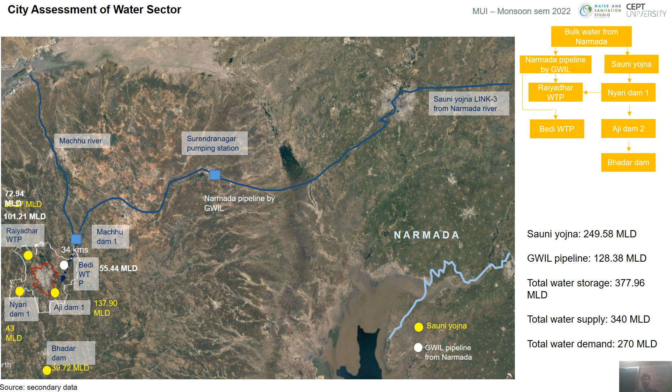Our city assessment of Rajkot depends mostly on the Narmada river through GWIL pipeline, Sauni yojna, and then it goes to dams and WTPs. Rajkot city depends mostly on external water sources, and to find an alternate water source there has been a case study for popular water sources in India, under which groundwater treatment plant, wastewater treatment plant, different water reservoirs, dams, and desalination plant have been looked at.

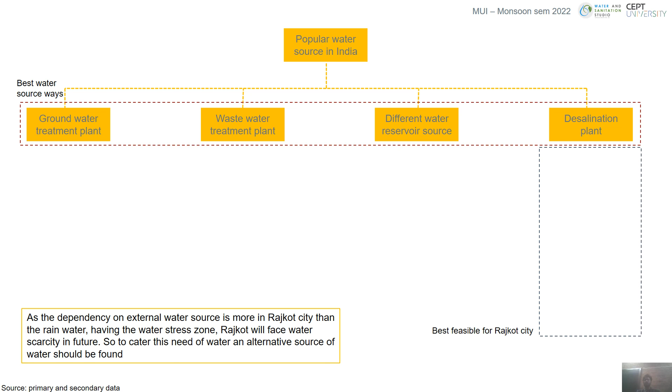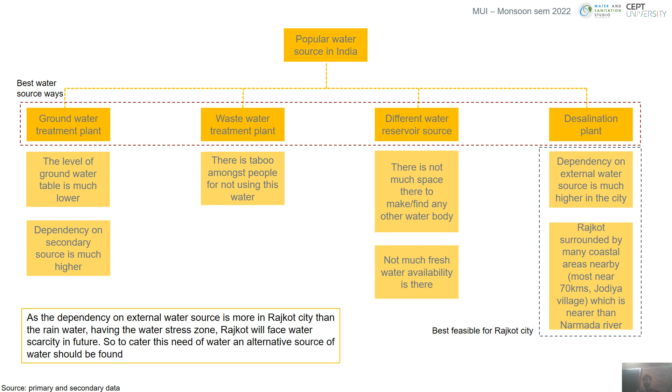Desalination plant is most feasible because groundwater level is low and dependency on secondary source is high, and there is a taboo amongst people for not using this water, and different site locations for reservoir and dams are not available.

Different case studies are seen, out of which some are taken as reference for my study. The technology used is seawater reverse osmosis plant, in which the process shows the intake facility to end user customers.

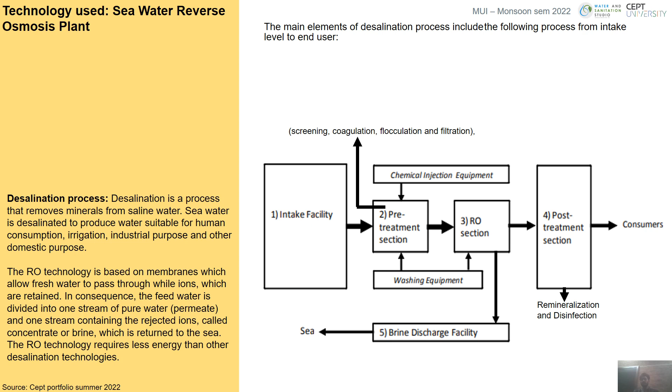Problem tree analysis highlights major problems such as water resources, urbanization, industrialization, which has effects on water stress, less water storage, and limited duration of water supply.

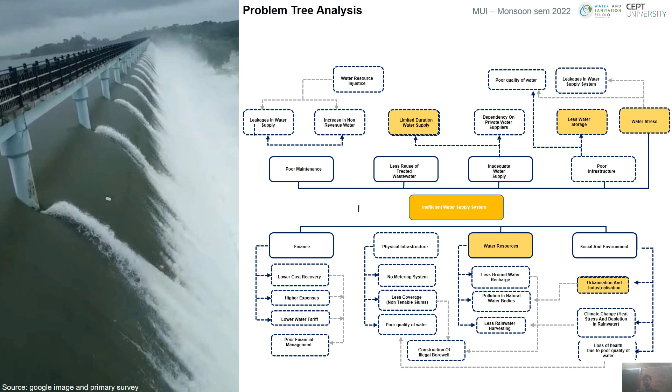The aim of the project is to identify a feasible alternate source of water in Rajkot city, followed through approach and methodology for the pilot project.

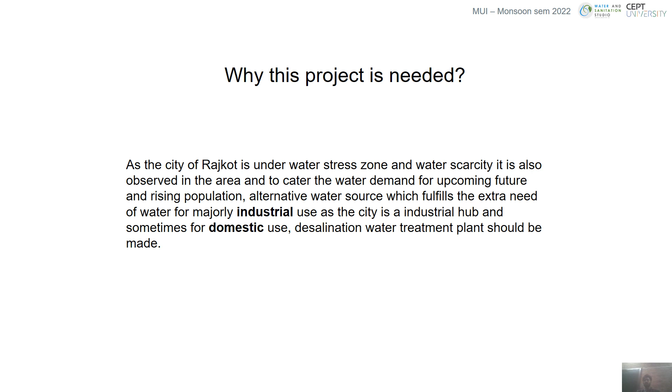This project is needed to supply water for future industrial use and in summer for domestic use.

Rajkot is an industrial hub and it receives water through GWIL or RMC water, private water supply, or private water borewells. Some industries were surveyed by me to know the water consumption.

Cost comparison is done through private water supply and desalination water, and desalination water is much cheaper than the private water supplier. Through surveys, people are more willing to pay for desalination plant water than private water supply.

In summer, the excess water will go to people for domestic use.

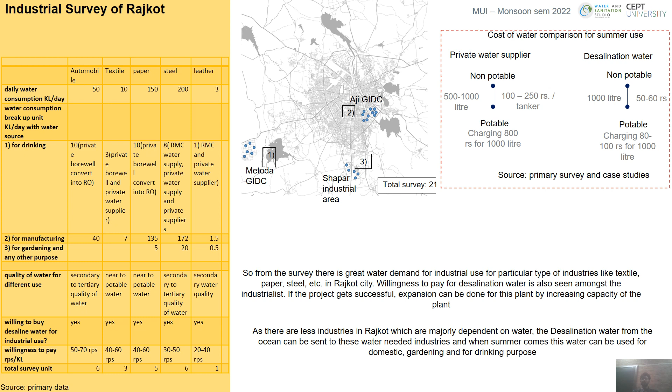Water from GWIL or RMC connections is not much in use in industries, while private water supply is not regularized, and borewells deplete the groundwater level.

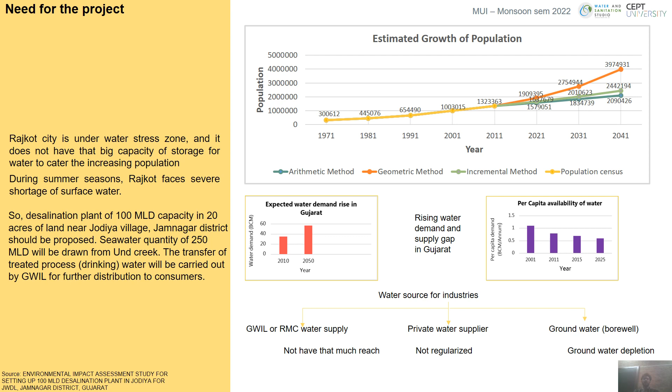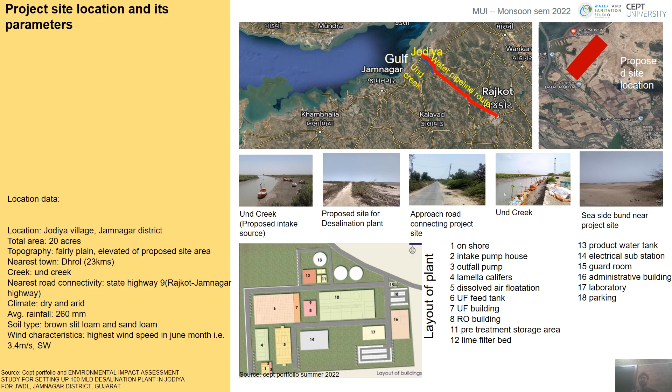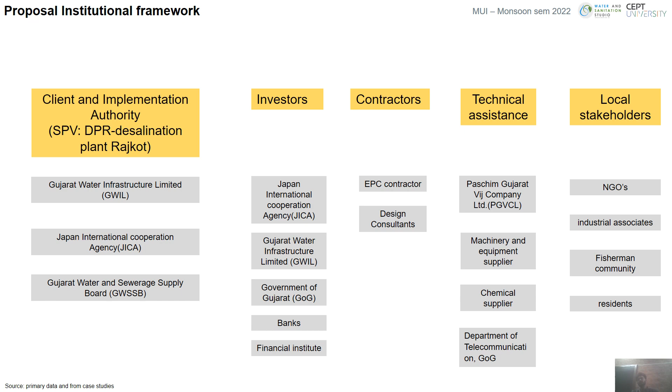Proposed institutional framework has five heads such as client and implementation authority of SPV, different investors, different contractors, different technical assistance, and different local stakeholders.

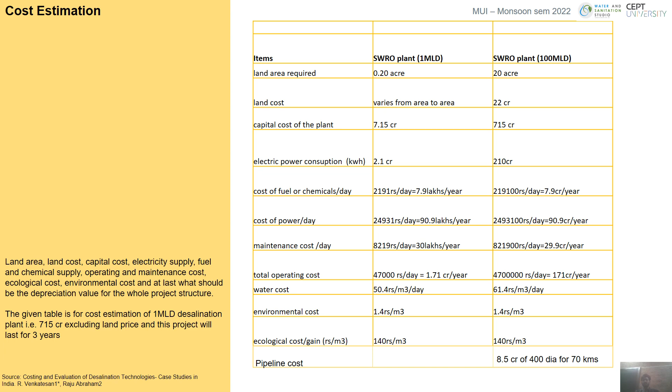Cost estimation for the project for one MLD plant is there through different references and case studies. From that I have taken out the 100 MLD cost, which is purely based on assumption and references through different case studies. The capital amount is 715 crore, and the construction phase is for 3 years.

The stakeholders are GWIL, GWSSB, and JICA, which form the SPV, which works for support agreement or permission for construction, and industrial agreement for buying water.

It looks into finance, project implementation, end users, and EPC contractors. From finance, it takes money through equity and debt, and some amount goes to capital expenditure, some goes to operational expenditure, and these work in two phases.

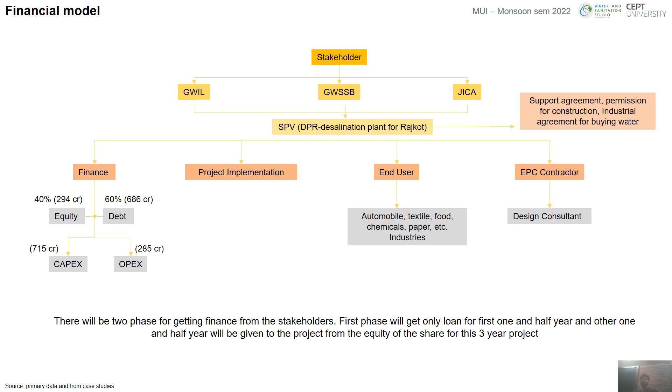The first 3 years have only outflow of cash, and after that inflow of cash starts with some amount of outflow of cash for operation and maintenance of the plant. After the 11th year, the break-even point is there, through which the main profit starts.

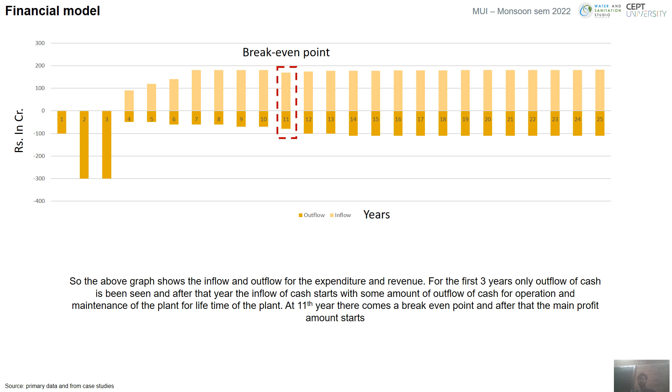So the main challenges and issues for implementing this project would be efficient planning, implementation of project, construction delay, and approval of different agencies, etc.

At last, there are some recommendations: the technology for this plant is costly, so financial mechanisms should be provided to make it cost effective, and public awareness should be increased to use the water.

ULB should provide a mandate and penalties for industries using this water. Thus, to conclude, providing multiple sources of water supply will reduce the stress on any one particular source.

Due to this it will cater to the future water demand and it will help in preventing the day zero scenario of the city.